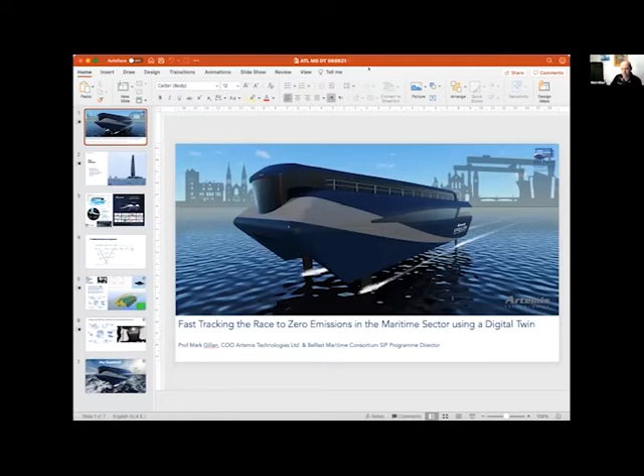I think we've got 10 minutes, so I'm going to rattle through the background of Artemis and what we're trying to achieve as a business, and really get into the meat of the discussion on digital twin. And Nick, you're quite right. Digital twin means many things to many people. And what I want to discuss is what we're interested in as a business.

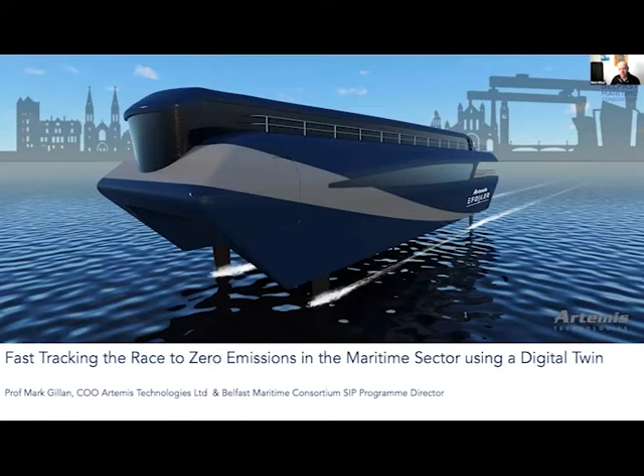So the first thing is Artemis Technologies. In terms of company, we set up in Northern Ireland a couple of years ago, mainly to help drive this mission of leading decarbonisation in the maritime industry. And we're really looking at innovative, sustainable technologies and products.

And we're building on a rich heritage of America's Cup participation and high performance competition in yachting. And we've transitioned to take that technology, particularly around hydrofoils, effectively underwater wings, and combining it with aerospace in terms of flight control, autonomous flight control systems, and also Formula One energy recovery systems to create these zero emissions maritime vessels.

But we can't do it by ourselves, and part of the reason of being in Northern Ireland is to work collaboratively with a large consortium. We formed the Belfast Maritime Consortium of 13 partners, which we lead, and the consortium members are listed here.

And this slide gives you a feel for the type of vessel that we're building. Everything zero emissions, high-speed foiling vessels with a range of different attributes, from zero wake to very quiet, very good ride comfort, this is really transformative in the market. And we aim to have a demonstrator in the water towards the end of this year, beginning of next year, a much smaller vessel, which you can see at the bottom of the page.

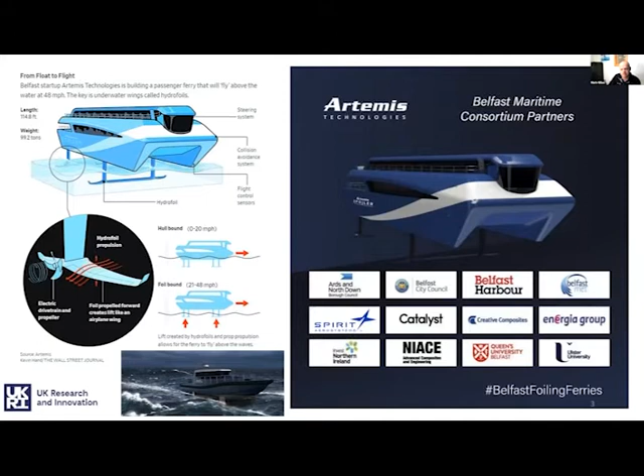So getting into the actual digital twin aspect, the traditional development programme. I come from aerospace and automotive, albeit Formula One, but I worked quite a lot in automotive OEMs over the years. And going back, the traditional design process for a complex system is a left to right development V, where you start with an idea, either market input or design with a concept.

You work your way down the V, going from concept design to system design to component design, getting an optimal concept, and then you work your way back up the V, making bits and testing them. You start with the component, then the system, then the full system, and then multiple prototypes.

And going back maybe 20 years or so in the automotive industry, you would literally have hundreds of prototypes for a new car. That's very costly, takes a lot of time, and also leads to a lot of costly rework. So from a sustainable design process, it's not very good. There's a lot of wastage in the process.

And time costs money. So the time taken to go from market input to product in the market is obviously substantial. And the whole point of this digital twin is to take this V and try and collapse it as much as possible and go from idea to product as quickly as possible.

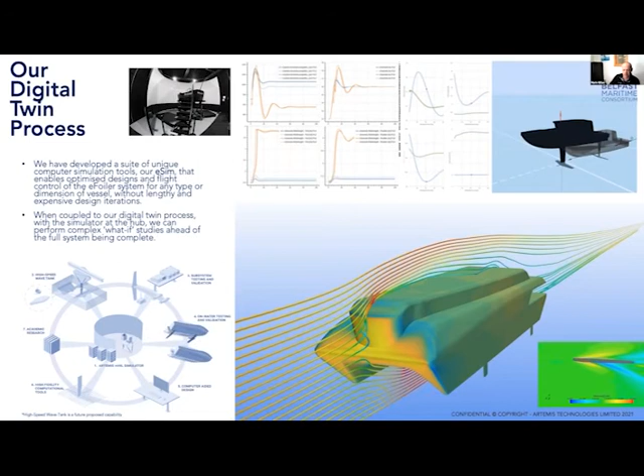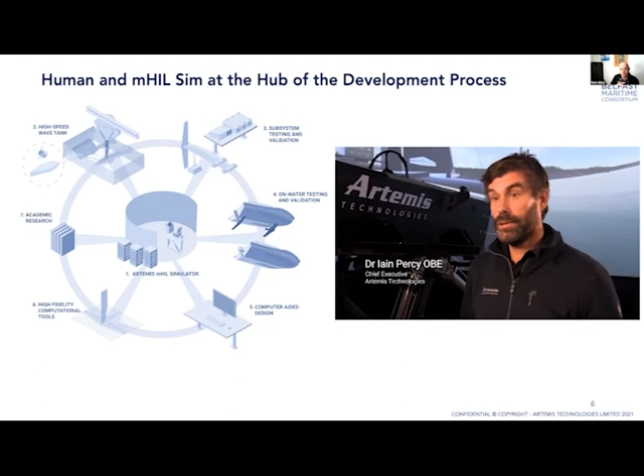So over the years, we've developed this suite of tools with different levels of fidelity to be able to run the tools real time in the loop with the simulator, with the human in the loop, and also with hardware in the loop. And what I'd just like to finish with is there's a bit of talking in this slide, but I've actually just muted it. That's not the important bit. This is the simulator. Actually, you probably see in the back there's a big black box behind me. This is where our simulator's sited in our Northern Ireland facility.

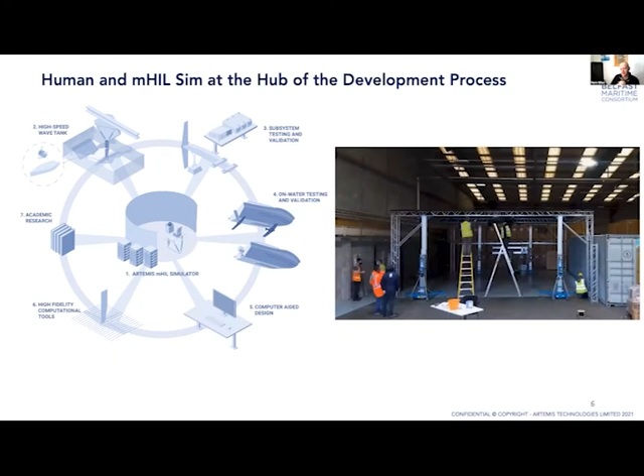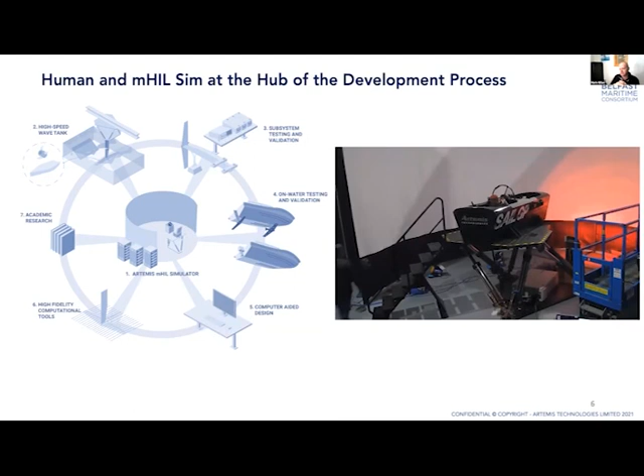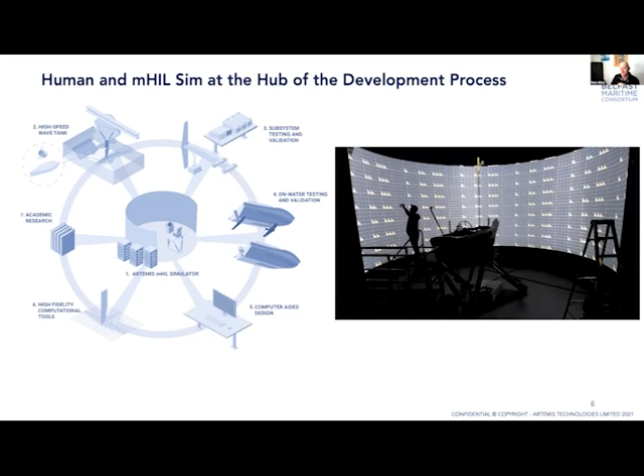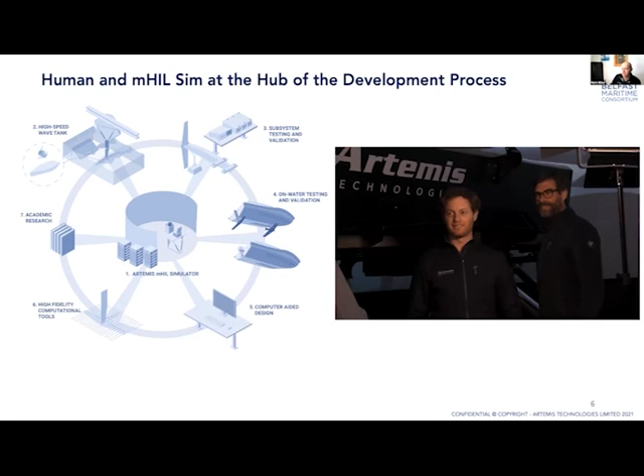But I wanted to show you in a bit of stop-go photography the simulator being installed here from our English base to our Northern Ireland base, and the synergies that Nick and Beth talk about are absolutely there. So everything from cybersecurity to the electronics to the screen side, and the integration with a lot of the actual activity that's ongoing here in Northern Ireland, particularly around City Deal funding, is very much there. So from our perspective, we want to use this tool to de-risk not just the performance, but also the hardware, so that we don't have to do these multiple stages of prototype.

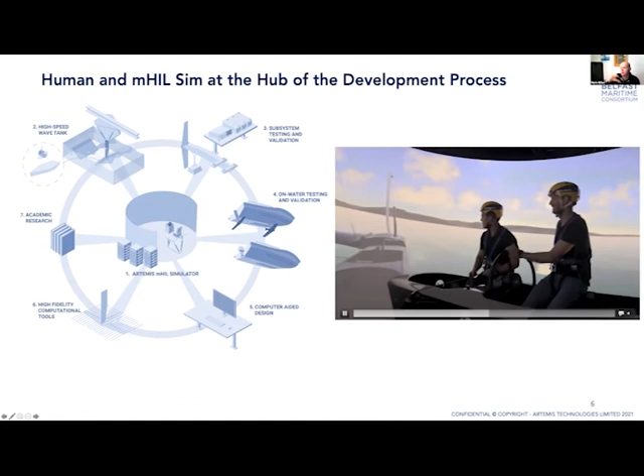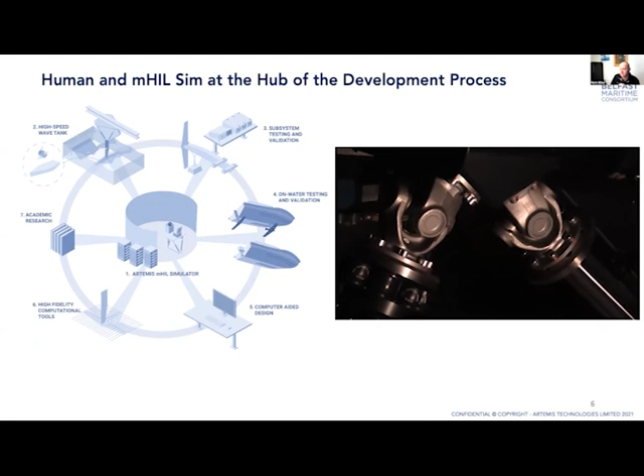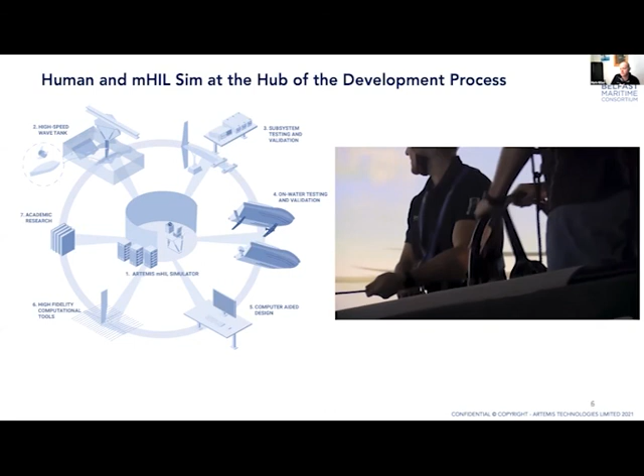What you see on the sim is actually a SailGP cockpit, but we can remove that cockpit off our simulator and actually put in the cockpit for any of our vessels and be able to replay the screen to show the real environment. We can replay any wave and water state, sea state that we want, and effectively tune the performance of the vessel and tune the pilot, and from a skills perspective as well. So again, it's not just performance of the vessel, but it's performance of the crew on board too. So this is a unique capability.

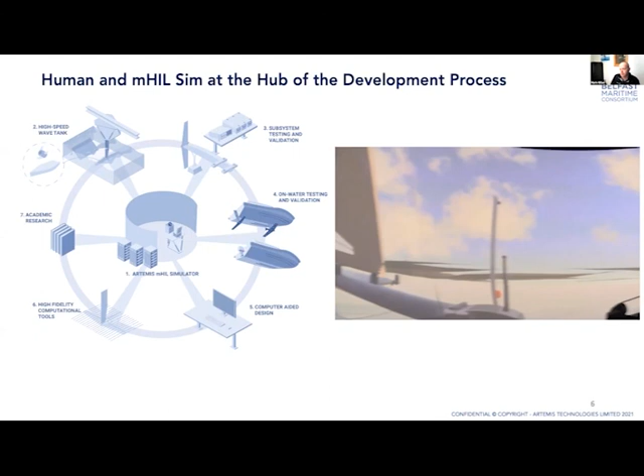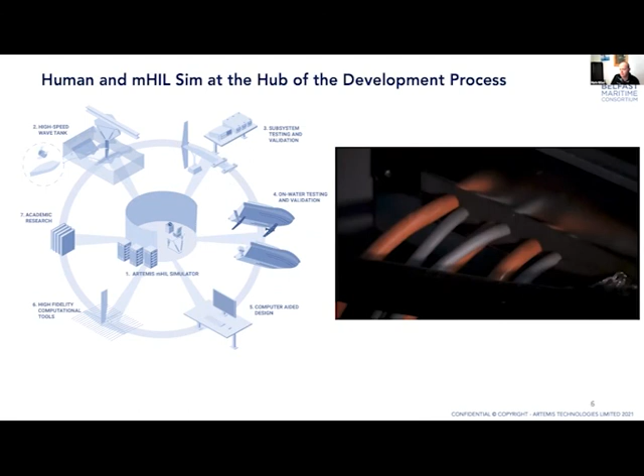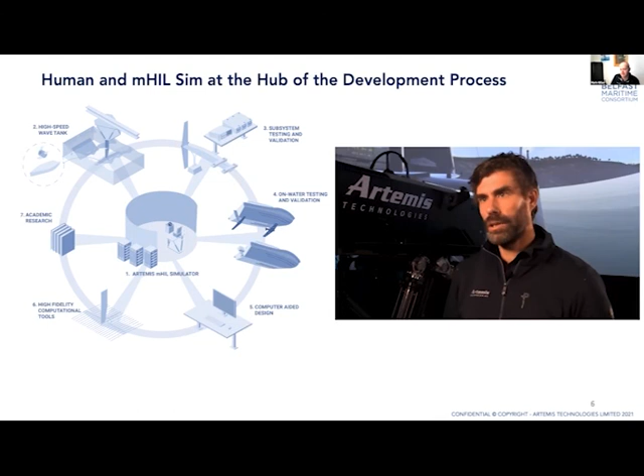And sometimes world class is an overused term, but this truly is a world class facility here in Northern Ireland. I'm very, very happy to be collaborating with the universities and companies and the local councils, etc., to develop what will be the world's most advanced zero emissions vessels. And the first one of those will be in the water by the end of this year, beginning of next. But it's a result of this digital twin capability.